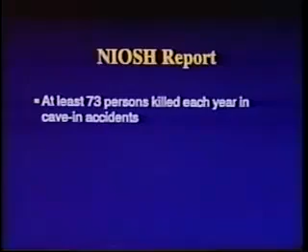The National Institute of Occupational Safety and Health, NIOSH, conducts research on various safety and health problems, provides technical assistance to OSHA, and recommends standards for OSHA's adoption. In a recent report prepared by NIOSH based on OSHA's inspection data, it was estimated that at least 73 persons were killed each year in cave-in accidents, and at least 97 persons were killed as a result of all excavation-related accidents. This program presents an overview of OSHA's requirements for protection of employees in excavations.

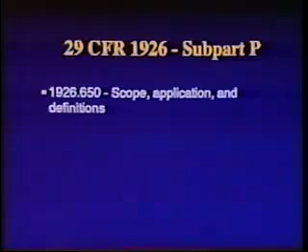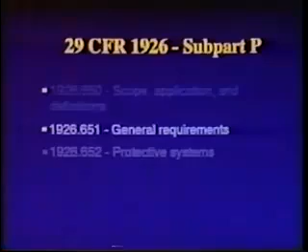OSHA's excavation standard is contained in its Code of Federal Regulations for the Construction Industry, 29 CFR, Part 1926. The standards found in Subpart P consist of 3 sections. Section 1926-650 contains the scope, application, and definitions applicable to Subpart P. Section 1926-651 contains general requirements, and Section 1926-652 contains requirements for protective systems. There are also 6 appendices, A through F.

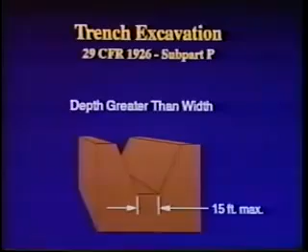OSHA's excavation standard defines excavations to include trenches. The standard states that, in general, the depth of the trench is greater than the width, but the width of the trench, measured at the bottom, is not greater than 15 feet.

OSHA Standard 29 CFR 1926-651 contains requirements for the protection of employees against several different types of hazards of excavation-related work. Let's look at some of these.

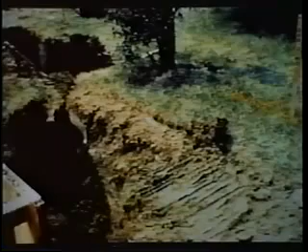All surface encumbrances such as trees or boulders that are located so as to create a hazard must be removed or supported to safeguard workers.

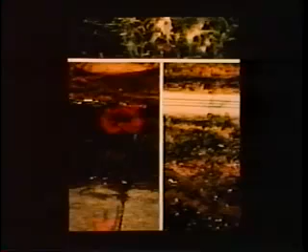The estimated location of utility installations such as sewer, water, fuel, and electric lines, or any other underground installations that may reasonably be met with during excavation work are to be determined prior to opening the ground. Prior to start of actual operations, the utility companies or owners are to be advised of the proposed work and asked to establish the underground installation's actual location.

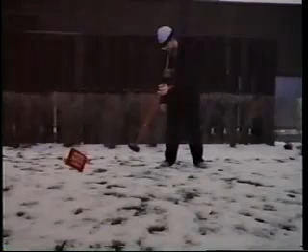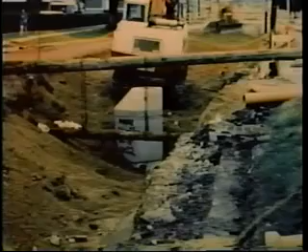When the utility or owner cannot establish exact locations or respond in a timely manner, the contractor may proceed with caution. Detection equipment or other acceptable means to locate utility installations must be used. When excavation work nears the estimated location of the installations, the exact location is to be found by safe and acceptable means. While the excavation is open, underground installations must be protected, supported, or removed as necessary to safeguard employees.

Flooding, shock, asphyxiation, electrocution, fire, explosion, and collapse of undermined installations are some of the hazards that result when underground installations are damaged.

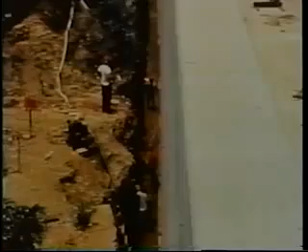Structural ramps must be designed and constructed to meet the requirements of their usage. Safe means of entering and leaving excavations must be provided for workers. A stairway, ladder, ramp, or other safe means of egress must be located in trench excavations 4 feet or more in depth so as to require no more than 25 feet of lateral travel. This is to allow workers to get out quickly in the event of an emergency.

Employees exposed to public vehicular traffic shall be provided with and must wear warning vests or other suitable garments marked with or made of reflectorized or high visibility material.

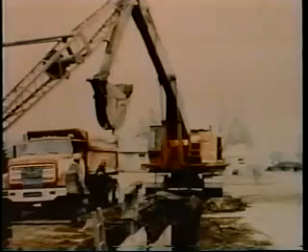Employees are not allowed under loads handled by lifting or digging equipment. Employees must stand away from vehicles being loaded or unloaded to avoid being struck by spillage or falling materials. Operators may remain in the cabs of vehicles being loaded or unloaded when the vehicles are equipped to provide adequate protection for the operator during these operations.

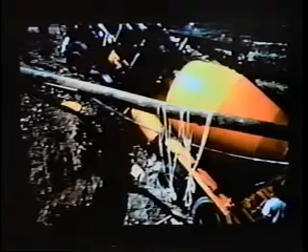When mobile equipment is operated next to an excavation or when it must approach the edge of an excavation, and the operator does not have a clear, direct view of the edge, a warning system must be used. This system may involve barricades, stop logs, or signals.

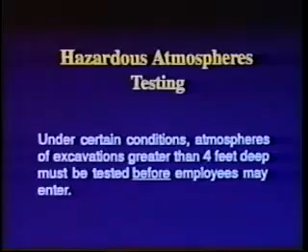To prevent exposure to harmful levels of air contaminants and to assure acceptable atmospheric conditions, certain requirements must be met. Under certain conditions, atmospheres of excavations greater than 4 feet deep must be tested before employees may enter. Testing is required where oxygen deficiency, that is less than 19.5% oxygen, or a hazardous atmosphere exists or could reasonably be expected to exist.

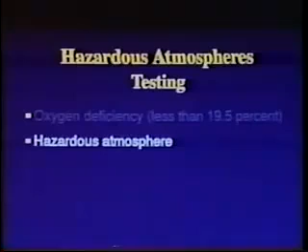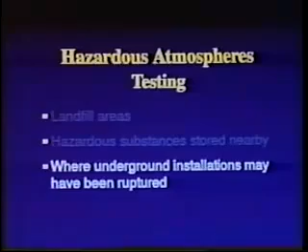Examples of these conditions include excavations in landfill areas or where hazardous substances are stored nearby, or where underground installations may have been ruptured. Adequate precautions shall be taken to prevent employee exposure to atmospheres containing less than 19.5% oxygen and other hazardous atmospheres.

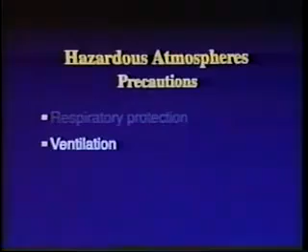These precautions include providing proper respiratory protection or ventilation. When controls such as ventilation are used to reduce the level of atmospheric contaminants to an acceptable level, testing is to be conducted as often as necessary to ensure continuing safety.

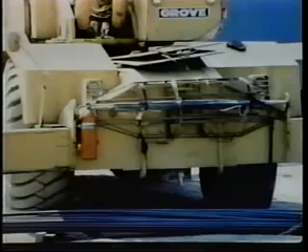Emergency rescue equipment such as breathing apparatus, a safety harness and line, or a basket stretcher must be readily available where hazardous atmospheric conditions exist or can reasonably be expected to develop. This equipment must be attended when in use.

Employees entering deep and confined footing excavations are to wear a harness with a securely attached lifeline. The lifeline is to be separate from any line used to handle materials and is to be individually attended at all times while the employee wearing the lifeline is in the excavation.

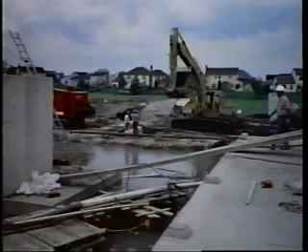Water is very likely to be present during the course of work in many excavations and is one of the major concerns during excavation operations. The action of water against the sides of excavations can cause undermining and cave-ins. The presence of accumulated water in or around excavations must, therefore, be treated with caution.

Employees shall not be permitted to work in excavations where water has accumulated or is accumulating unless adequate precautions have been taken to protect them. Necessary precautions vary with each situation but could include special support or shield systems or water removal.

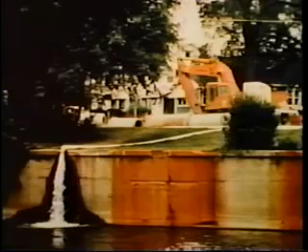If water removal equipment is used, the equipment and its operation must be monitored by a competent person to assure continued proper operation. If excavation work interrupts the natural drainage of surface water, diversion ditches, dikes, or other means must be used to prevent surface water from entering the excavation and to provide safe drainage of the adjacent area.

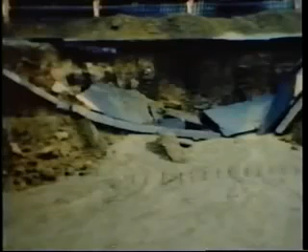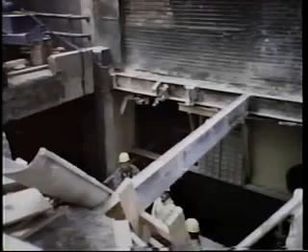Workers may also face hazards where the stability of adjacent buildings, walls, or other structures is endangered by excavation operations. Support systems such as shoring, bracing, or underpinning must be provided to ensure the stability of such structures for the protection of employees. Excavation below the level of the base or footing of any foundation or retaining wall that could be reasonably expected to pose a hazard to employees is not permitted

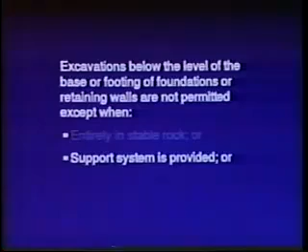except when the excavation is entirely in stable rock or a support system such as underpinning is provided to ensure employee safety and stability of the structure, or a registered professional engineer, PE, has approved the determination that the structure is far enough away not to be affected by excavation activity, or that such excavation work will not pose a hazard to employees.

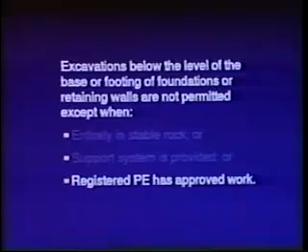Sidewalks, pavements, and appurtenant structures may not be undermined unless a support system or another method of protection is provided to protect employees from possible collapse.

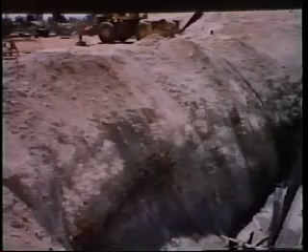Employees must be protected from loose rock or soil which might create a hazard by falling or rolling from the excavation face. Materials and/or machines may become hazardous if measures aren't taken to keep them from sliding or falling into an excavation where employees are working.

Protection of employees from materials or equipment which could fall or roll into an excavation shall be provided by keeping them at least 2 feet from the edge of excavations, or by the use of adequate retaining devices, or by a combination of both if necessary.

Daily inspections of excavations, the adjacent areas, and protective systems must be made by a competent person for evidence of a situation that could result in possible cave-ins, failure of protective systems, hazardous atmospheres, or other hazardous conditions.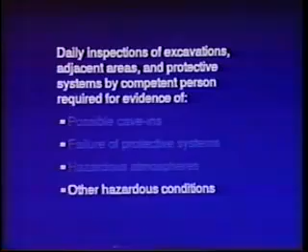Excavations subject to heavy rain runoff are to be inspected by a competent person and, as necessary, precautions instituted to protect against the hazard. Inspection shall be made after every rainstorm or other hazard-increasing occurrence.

The competent person shall make inspections prior to the start of work and as needed throughout the shift, as well as after every rainstorm or other hazard-increasing occurrence. These inspections are only required when employee exposure can be reasonably anticipated.

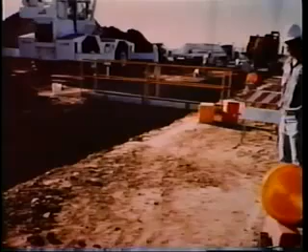Where employees or equipment are required or permitted to cross over excavations, walkways or bridges with standard guardrails must be provided. Excavation safety requires pre-planning. Let's take a look at some other areas where anticipation of possible hazards can help avoid accidents and injuries.

OSHA Standard 29 CFR 1926.652 contains requirements for the protection of employees from cave-ins through the use of protective systems.

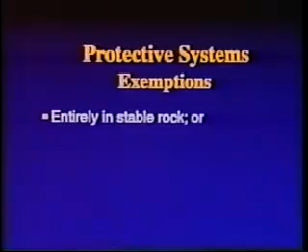OSHA requires that each employee in an excavation be protected from cave-ins by a protective system, except when excavations are made entirely in stable rock, or excavations are less than 5 feet in depth and determined by a competent person to show no indication of potential cave-in.

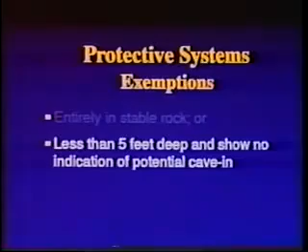OSHA divides protective systems into two categories: sloping and benching systems, and support systems, shield systems, and other protective systems. The use of either of these categories requires the choice of one of 4 design options.

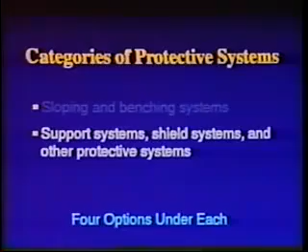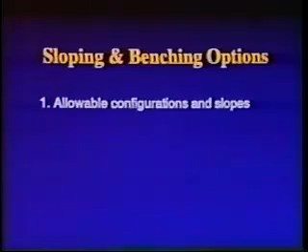Let's first look at the allowable options when choosing sloping and benching systems. The options include allowable configurations and slopes, the use of Appendices A and B, designs using other tabulated data, and design by a registered professional engineer.

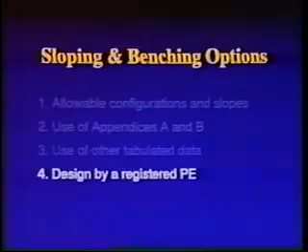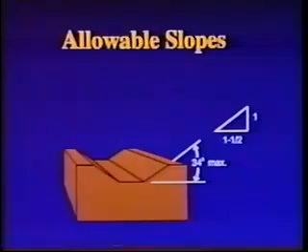The first option specifies allowable configurations and slopes. Any excavation less than 20 feet in depth may be sloped at an angle not steeper than 1 1/2 horizontal to 1 vertical, 34 degrees measured from the horizontal. Such slopes meet OSHA's requirements for worst-case soils, Type C, as defined in 29 CFR 1926, Subpart P, Appendix A.

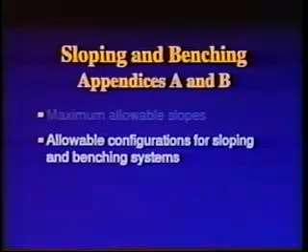The second option involves the use of Appendices A and B. Maximum allowable slopes and allowable configurations for sloping and benching systems are set forth in Appendices A and B.

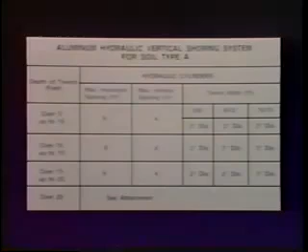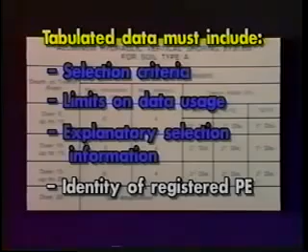The third option, when choosing sloping and benching systems, involves the use of tabulated data, such as tables and charts. The tabulated data must be in written form and include selection criteria, limits on data usage to include the magnitude and configuration of slopes determined to be safe, explanatory information necessary to aid the user to make correct selection of protective systems, and the identity of the registered PE who approved the data.

At least one copy of this data must be kept at the job site during construction of the protective system.

The fourth option involves the design by a registered professional engineer. Designs must be in written form and must include the magnitudes and configurations of slopes and benches determined to be safe for the project, as well as the identity of the approving PE.

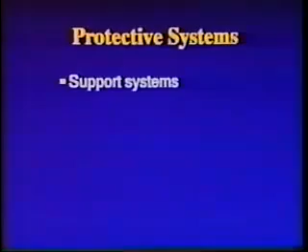The second category of protective system prescribed by OSHA to protect employees from cave-ins involves the use of support systems, shield systems, and other protective systems. The use of this category also requires the choice of one of 4 design options.

The first option is to use Appendices A and C or D. For timber shoring in trenches, Appendix A, soil classification, and Appendix C, timber shoring, are to be used. Hydraulic shoring of trenches calls for use of either Option 2, manufacturer's tabulated data, or Appendix D, aluminum hydraulic shoring. Appendix D is to be used when manufacturer's tabulated data are not available.

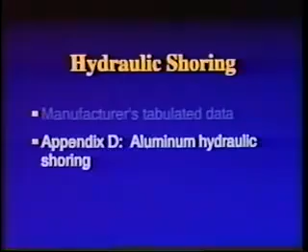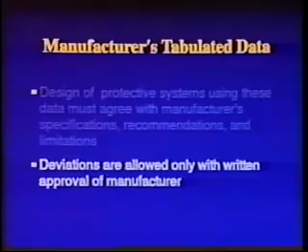The second option is to use manufacturer's tabulated data. Design of support, shield, or other protective systems using these data must agree with all specifications, recommendations, and the limitations issued or made by the manufacturer. Deviations are allowed only with the manufacturer's specific written approval. These data are to be in written form and kept at the job site during construction of the protective system.

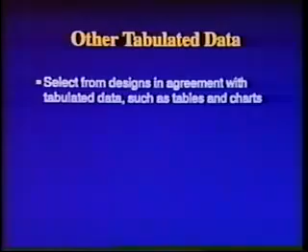The third option when choosing the use of support, shield, or other protective systems is design using other tabulated data. The contractor may select from designs in agreement with tabulated data, such as tables and charts, approved by a registered professional engineer. The written data are to be kept at the job site during construction of the protective system, and shall include the parameters that affect system selection, the limits of data usage, and any explanatory information necessary to make the correct system selection.

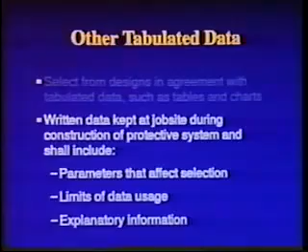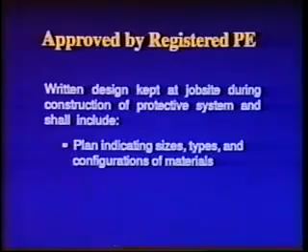The fourth option is to use a design approved by a registered professional engineer. Such designs are to be written, kept at the job site during construction of the protective system, and include a plan indicating the size, types, and configuration of the materials to be used, and the identity of the approving registered PE. Materials and equipment used for protective systems must be free from damage or defects that might impair their proper function.

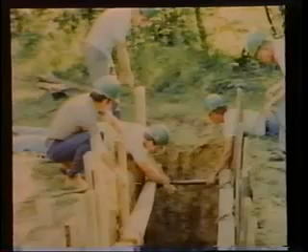A competent person shall examine damaged material or equipment to evaluate its suitability for continued use. Material or equipment found unsafe for continued use shall be removed from service. Members of support systems are to be securely connected to prevent sliding, falling, kickouts, or other predictable failures. Support systems must be installed and removed in a way which protects employees from cave-ins, structural collapses, or from being struck by system members.

Installation should begin at the top and progress to the bottom of the excavation. Removal reverses this process. Installation of support systems is to be closely coordinated with the excavation of trenches. Backfilling shall progress together with the removal of support systems.

Material may be dug to a level no more than 2 feet below the bottom members of a support system if the system is designed to resist the forces calculated to the full depth of the trench, and there is no indication of soil loss from behind or below the bottom of the support system. This allowance for 2 free feet also applies to trench shields.

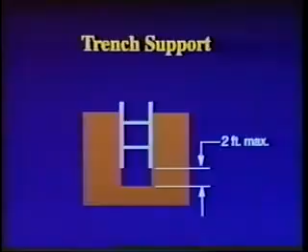Employees may not work on the faces of slopes or benches above other workers unless the workers at the lower level are protected from the hazard of falling, rolling, or sliding material or equipment.

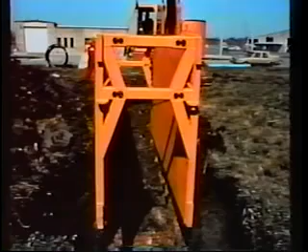Shields shall be installed in a way that will restrict lateral or other hazardous movement of the shield in the event of sudden lateral pressures. Employees are not to be in shields when they are being installed, removed, or moved vertically. Employees may remain inside shields being moved horizontally.

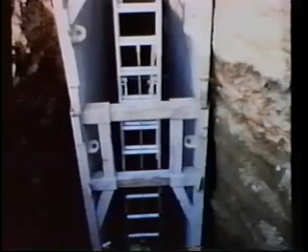Employees are also to be protected from the hazards of cave-ins when they're entering or leaving the areas protected by the shield. Contractors who choose to use the appendices of OSHA's excavation standard in design and construction of a protective system must thereafter treat the provisions of the selected appendices as mandatory.

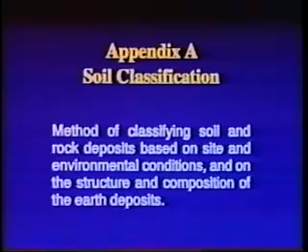Appendix A describes a method of classifying soil and rock deposits based on site and environmental conditions and on the structure and composition of the earth deposits. The appendix contains definitions, sets forth requirements, and describes acceptable visual and manual tests for use in classifying soils.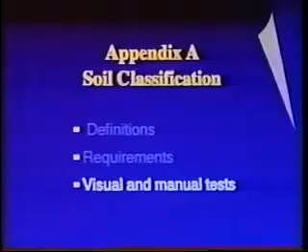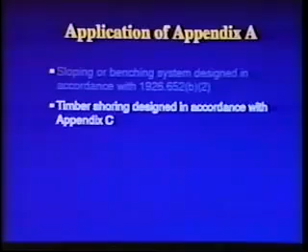This appendix applies when a sloping or benching system designed in accordance with the requirements of 1926.652(b)(2) is chosen, when timber shoring for excavations is designed in accordance with Appendix C of Subpart P, or when aluminum hydraulic shoring is designed in accordance with Appendix D.

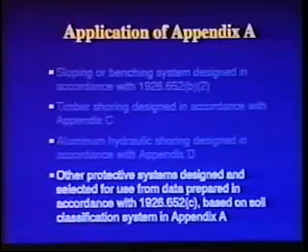Appendix A also applies if other protective systems are designed and selected for use from data prepared in accordance with requirements set forth in 1926.652(c), and the use of the data is based on use of the soil classification system presented in Appendix A.

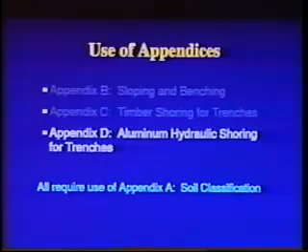To restate, use of Appendix B, sloping and benching, Appendix C, timber shoring for trenches, or Appendix D, aluminum hydraulic shoring for trenches, all require the use of Appendix A, soil classification. Indeed, any protective system based on the use of the soil classification system presented in Appendix A must meet all the requirements of that appendix.

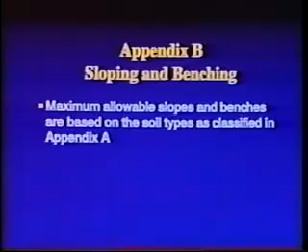Appendix B contains specifications for sloping and benching when used to protect employees from cave-ins. Maximum allowable slopes and benches are based on the soil types as classified in Appendix A and are found in tables B1 through B14.

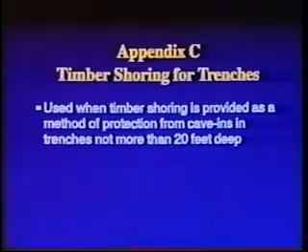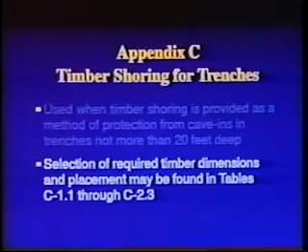Appendix C contains information to be used when timber shoring is provided as a method of protection from cave-ins in trenches not more than 20 feet deep. Selection of required timber dimensions and placement may be found in tables C-1.1 through C-2.3. Each table presents the minimum sizes of timber members to use in a shoring system.

Tables C-1.1 through C-1.3 are for actual size. Tables C-2.1 through C-2.3 are for nominal size.

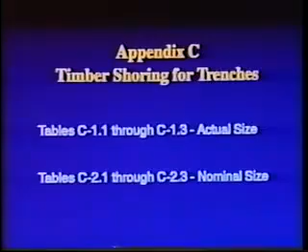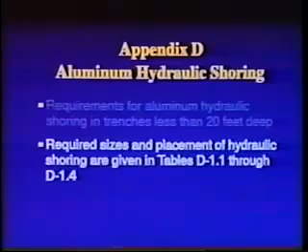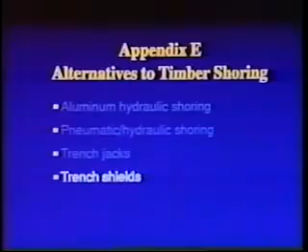Appendix E illustrates alternatives to timber shoring such as aluminum hydraulic shoring, pneumatic hydraulic shoring, trench jacks, and trench shields. Appendix F presents a graphic summary of the requirements and options in Subpart P for excavations 20 feet or less in depth.

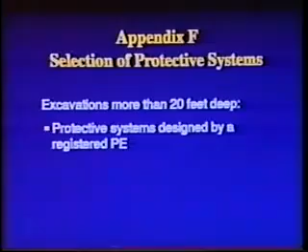Deeper excavations require protective systems designed by a registered professional engineer or manufactured systems capable of the needed depth and used in accordance with manufacturer specifications.

This program has presented an overview of OSHA's requirements for protection of employees in excavations. Strict adherence to these regulations can substantially reduce the number and severity of accidents resulting from excavation work.